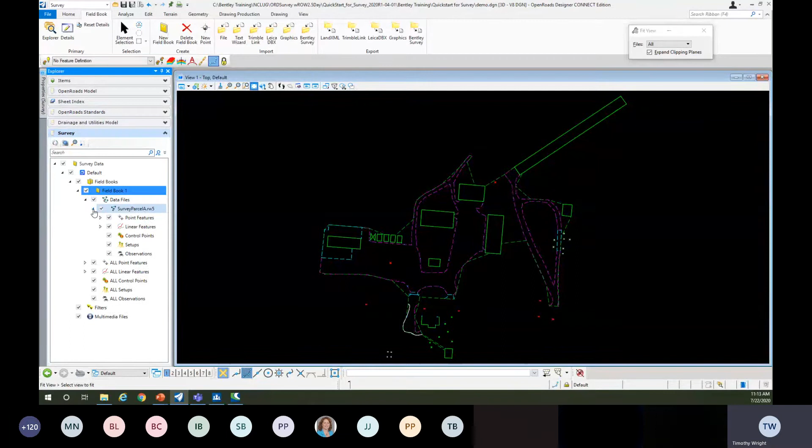One of the first things I want to talk about are these little boxes with check marks, because this can get you into a little bit of trouble. As you're clicking these triangles to expand the different sections, it's easy to drift your mouse over and click on that checkbox, and you'll see what happens then - everything disappears. It's really cool that you can turn things off by point code or point list, like if you want to turn all your chains off or all your linear features off, and just see the pavement points. That's really awesome. But just don't forget that you've got everything turned off. I catch myself a lot of times like, where is my right of way or where's my sidewalks? At some point I've inadvertently turned those off. So that's the first thing I want to make you aware of - these check marks turn things on and off, because that will get you confused.

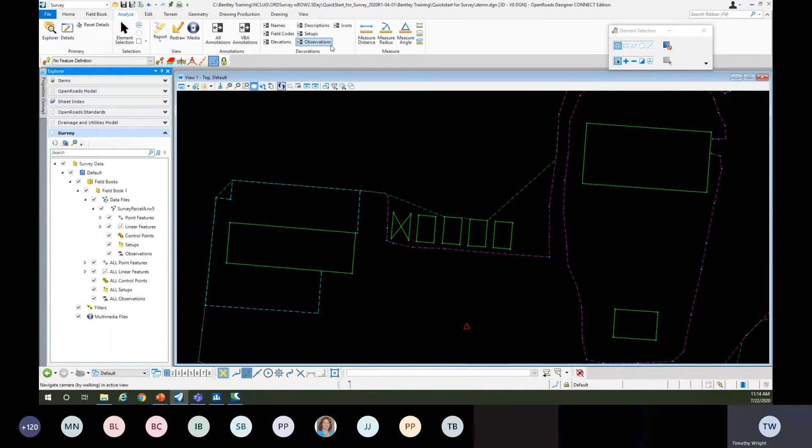The next thing is under this Analyze tab, we have something unique for survey. Design has a bunch of tools that are kind of unique to design, like the cross-section viewer and things like that. Well, survey has some tricks up its sleeve too. After we've processed this data, we can use these decorations.

Now, decorations are a personal type preference here. So now that I zoom in, you can see that I've got my point names, and I can turn on field codes and elevations and descriptions and even icons. Now, what icons do - you'll see we actually have a few data problems with our data here. Let me turn those others off real quick so you can see that. So the software realizes that there are some processing issues with some of these elements. We'll talk about each one of these in turn, but that's a nice one.

So the bad thing about decorations, and the thing that I keep harping on them about, is that there's no toggle - the background doesn't turn blue or orange like some of the icons do. That's kind of obnoxious. It is kind of hard to tell sometimes whether you've got things turned on and off, and you just have to come in here and click on those.

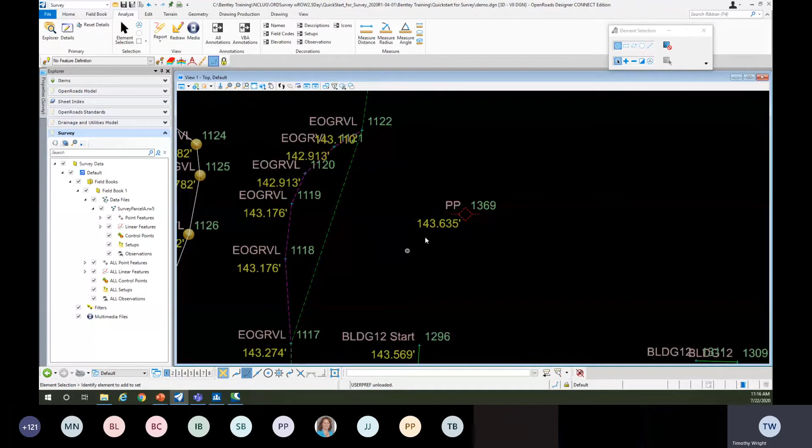If you don't like my colors or the location or the size of that text, that's a simple matter to go back into your user preferences here. I'm just going to show this real quick, not really get into the editing. But under View Options, Civil is Survey Decorators - there's a category. So if you want to get in there and play with those colors or sizes, feel free to do that. It's a user preference, so it's not going to affect anybody else or the drawing. This is a user preference. So again, this is just a tool, it's not labeling - these are not static text elements. I do believe they'll plot though, I do think they'll print because it's usually WYSIWYG - what you see is what you get. All right, just for sake of clarity, I'm going to turn all those off. I will leave the icons on.

So that's the interface in a nutshell. Again, go ahead and open up the Explorer, get it docked off to the side wherever you want, but you need to leave it open because this is our playground, this is our environment. And don't forget about decorations - you can come out here and toggle point names on and off.

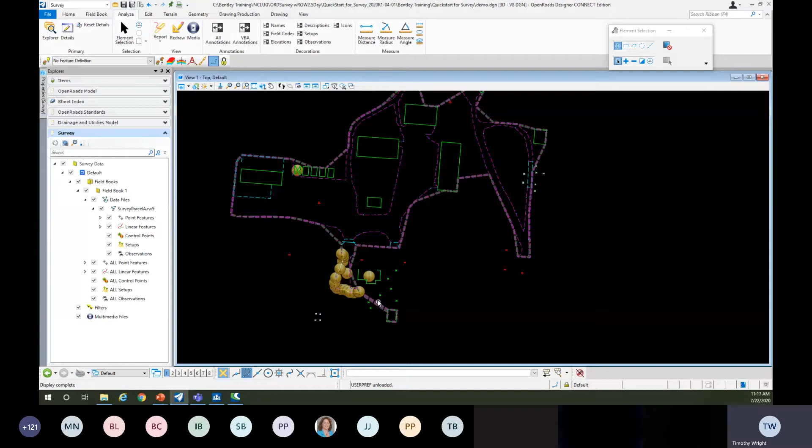So let's talk about what we got here. We've got a file that processed in. Like I said, this was all done by standards, so the software knew how to handle this data. In the next set, we're not going to be so lucky, so we'll have to jump through another hoop or two to get that to work. But let's talk about editing here.

The first thing we'll see is this green dashed outline, and that's our terrain model, and that's the star of the show today. If you're not familiar with the way terrain models work in Open Roads technology, it is an element that's going to contain all the information that we know about that existing ground. Now that could come from LiDAR data, it could come from hard survey shots like we see here. There are a lot of different sources where you can build this terrain model element. And it can take on different facades or different displays based on a feature definition.

Now, I always tell people when you're in the survey file or when you're in the terrain model file, ignore these two categories. These are the elements - I forget the exact term, but basically break lines, points, voids, things like that. These are elements inside the actual terrain model element, so actual physical things. Then things like contours, triangles, and flow arrows are all built on the fly. These are calculated features, or component features, I think - I don't remember. But I always tell people to really just ignore this, okay?

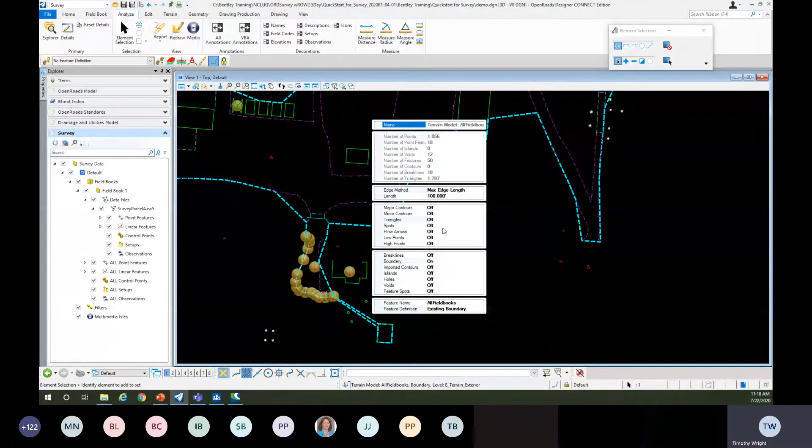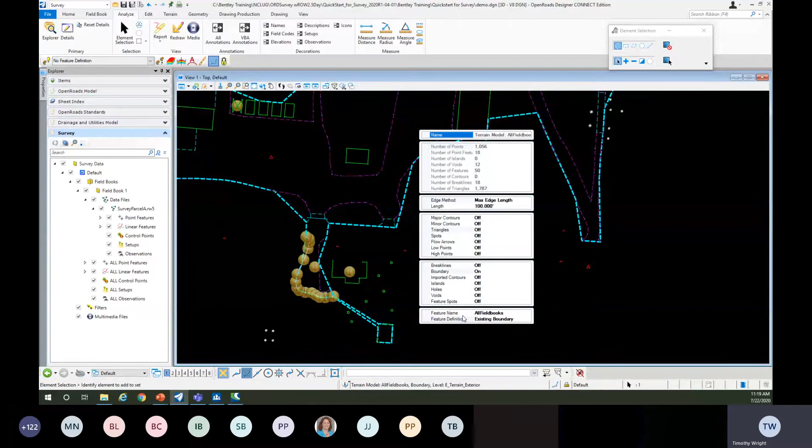This is more for when we reference that terrain model in - you can turn things on and off here. If I turn things on and off and something changes with that terrain model, as soon as I do that, it's going to go back to the feature definition, okay? So to clear up that headache, I always tell people, come down here to the feature definition. Right now you'll see we're set to existing boundary. I'm just going to click the down arrow and say, show me triangles instead. After a second, that file processes, and you can see the triangles there, okay?

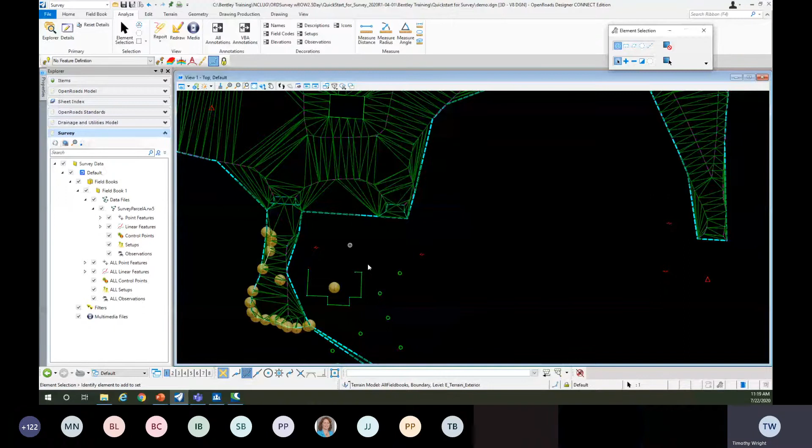Now, when I say processes, it's not like we recreated this element, right? The terrain element is what it is. It's just changing what features are displayed. Again, it's much better to do this via the feature definition when you're in the file than to toggle these on and off. I know it's right there, it's like why can't I click on it? But trust me, as soon as you make an edit, it will go back to the feature definition, and you'll just find yourself turning those on and off constantly.

So it's an option when you're surveying, or it's one of our configuration setups that we import, or we create the terrain model from the survey data as it's being processed, okay? You don't have to do that - this could simply be all the survey elements without the terrain model. But let me show you why I like to see the terrain model as I'm editing the data, because you can find a lot of errors just by looking at contours or triangles.

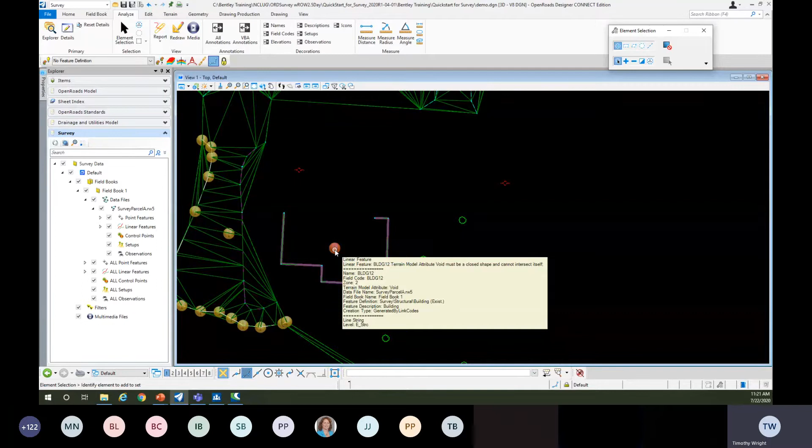It also, up there at the top, says the linear feature is a terrain model attribute void, but it must be a closed shape and cannot intersect itself. So we've got a problem, and the software says, hey, you told me buildings were voids, but I can't make a void out of an open element. So how do we fix that? There's a couple ways - let me show you the graphical way.

All I'm going to do, I've got my element selection tool selected here, I'm just going to left click on that chain. When I do that, you'll see these little bits of text pop up - these are handles. Elements now, there's no GPK - I don't know if you're InRoads or the other Geopak state, but we had a GPK file that ruled everything, right? That's where all the data lived, and that's no longer the case. Now all the data, the engineering data or the survey data, is on these elements themselves, or stored within them. You can tell that just by hovering over it - this thing knows a lot about itself.

These are the linking codes for the points. If you're not familiar with linking codes, they're a code added to a shot out in the field that says, hey, I'm going to start a line here, and then I'm not going to change that line till I get to the end. Well, that's the problem, because we went off and started picking up another house, right? And we never did close this house. So what I need to do is go to that last point that we picked and change its linking code.

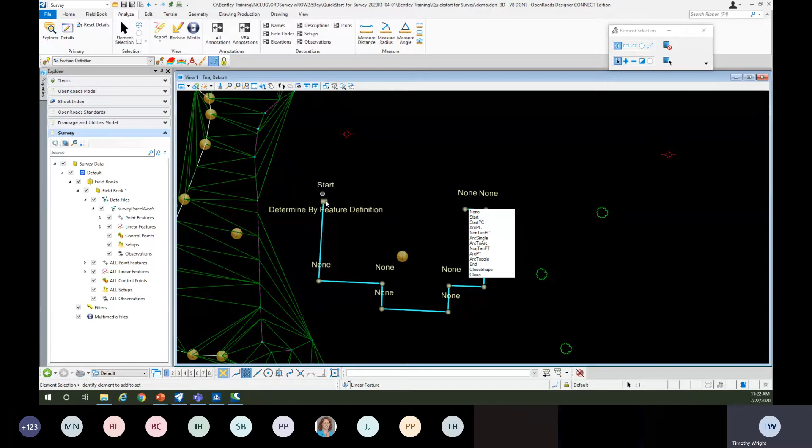The nice thing about these handles is I can left click on it and a little dialog pops up, and I can say, you know, you were really supposed to be a close. We'll talk about close shape in the next data set, but I'm going to say close. What that's going to do is take that final point right back to the start. But notice what happens to the terrain model - you can see our terrain model out here. So I'm just going to change that linking code, and instantly that terrain model updated.

If you haven't seen this before, your mind's blown, right? Because no longer do you have to say, well, is my DTM up to date, or my triangle file, however you handle that. Because as I edit this data, it's rebuilding that terrain model. So things have changed in those elements that go together to create that terrain model, and the terrain model automatically updates the triangle.

The other handle we have available on linear features is this determined by feature definition. If I hover over that, you can see that's actually the terrain model attribute. So right now, whether or not this house is part of my terrain model is determined by its feature definition. If you're not familiar with feature definitions, they're really the wave of the future and how OpenRoads Designer works.

Under our standards here, I can show you that real quick. We've got tons of feature definitions, and under survey, this goes pretty deep. I'll just pick one - how about landscaping? Well, there's only one under landscaping, tree, right? So for our trees here, there is a feature definition. There's a one-to-one relationship between the code out in the field and our feature definitions.

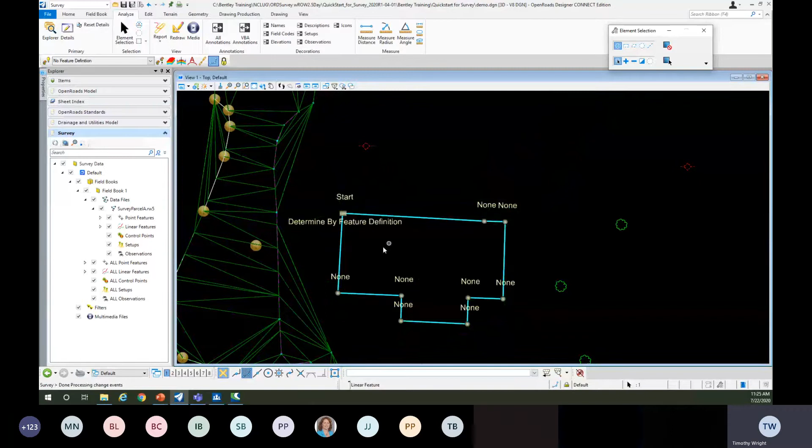But I can always come in here and say, you know what, even though you're supposed to be a void, nah, don't include. And you'll see it automatically drops it right out of there. That handle just needed to update. If I wanted to change that back, it's an easy matter to do. And again, the terrain model updates almost instantaneously. So that's a quick edit, right?

There's other ways to edit too. So as I come in here, I've got a culvert right here, and I happen to know that this point here, you'll look at its elevation at 142.71. If I look at the other point over here, it's also at 142.71. Now that might cause a problem.

So what I'm going to do is select it, and then go over here to my properties tab. You'll see why I kind of like that as a tab, because now when I hover over it, it pops up and there's my points. Now, anything in these fields that's black or dark, you can edit. You'll notice there's my elevation field right there.

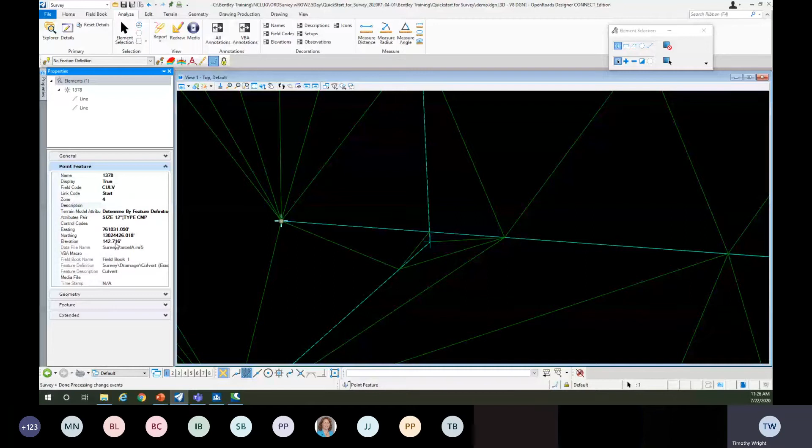So all I need to do then is come in if I want to make a change to that elevation, and I don't have to make a big change here. I'm just going to give it something so both of these slopes aren't the same, right? So we actually have a little bit of slope to our culvert. That was just an error in our processing.

Another thing we can see here is we've got a linear feature that's white. Let me do this real quick - I'm just going to turn off my triangles. Again, the way I'm doing that is just selecting it, going to the properties, and changing the feature definition. It really takes seconds to do that. So now we're back to just seeing that perimeter or boundary element.

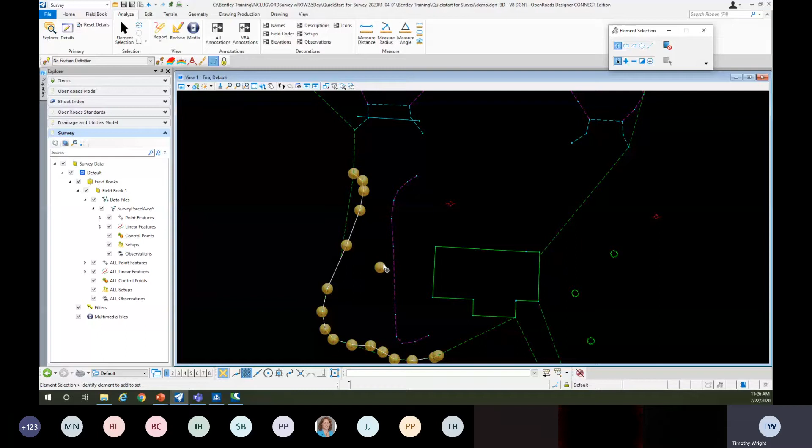So you'll see that there's a bunch of those icons all over there. And if I hover over it, it says EOGVL is not found in feature definitions. So what does that mean? Well, that means that we processed those elements and we couldn't find that feature code. And so we just gave it a default.

Now, if we hover over to the next one, you see we just fat fingered it out in the field, right? It's EOGRVL.

Okay, whereas this one is just EOGVL. So you might be tempted to just go ahead and grab that chain and change its properties, because you can look at that and you can change its field code. But I caution you against that.

I always tell my people, or the people that have taken my training, be a good physician. Because if you think about it, this linear feature has been created by those points. It's not like a separate entity. There's actually a relationship between these points and that linear feature. Let me show you that.

If I open up the points feature now, the category, you can see the different point codes or feature codes that have been entered in the field. So this is our list of points. We have some trees, some pavement, here's our EOGVL and our EO gravel. So you see the difference there, and this one's red.

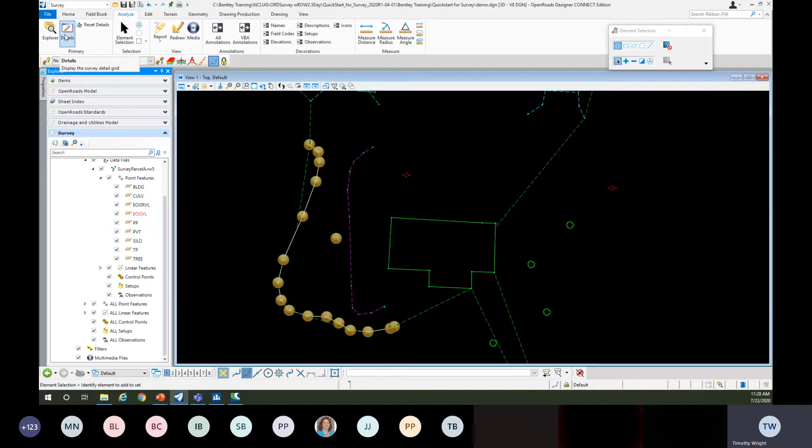I'm going to bring up the next one now. This is the details dialog. And I always like to have this one docked. Now, ironically, a lot of times surveyors are working on a single laptop screen, and we've got the biggest dialogues, it seems. So it's kind of an oxymoron. But it is what it is.

So you have to deal with it. If you do have the benefit of two monitors, by all means, grab this survey details, yank it over to the other side, and expand it maybe half the screen. Because these two work in tandem.

As I come over to the Explorer here, you'll see it's kind of shrunken up a little bit, but I can still scroll up and down through my list. As I select a category of points, like my EO gravel here, it populates down in the survey details.

And if you'll remember, I said, if a field is dark or black, you can edit it. And that's true here. So I could come in here and I could edit every single one of these attributes that's dark and make those changes. But you're probably thinking to yourself, well, I don't want to click through like 30,000 points to make that same change. Well, you don't have to.

You'll see we've got columns or rows over here where I can select those points, and it will highlight that point. It gives me a little identifier there, a little purple halo, and you can identify those points. So I can select each point in turn by clicking on its row here.

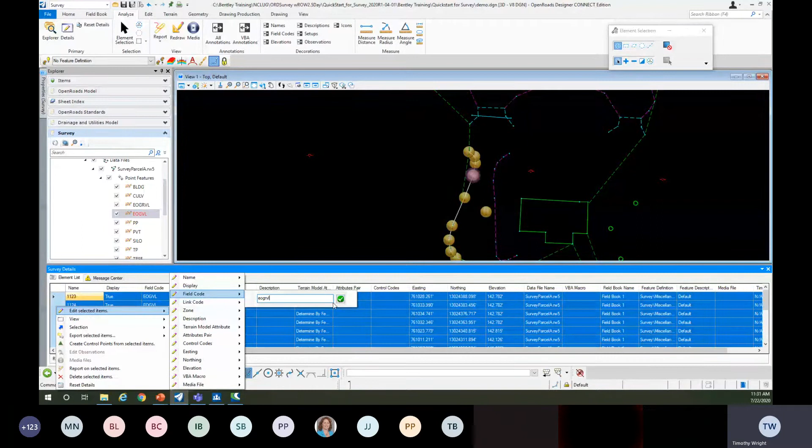So now it's going to be EOGRVL. Now, unfortunately, this is another thing that kind of drives me a little crazy. You have to click the little green arrow. Just hitting enter doesn't do you any good. So you got to hit the little green arrow.

You'll see that a lot in survey. As soon as I clicked that green arrow, look what happened to that line, because I changed the points, the underlying problem, and it fixed the line as well. So again, be a good physician. Don't treat the symptom, treat the disease, and the symptom will go away.

Okay, that works for triangles too. We had troubles with our triangles with this house. We didn't touch triangles. We changed the house and that fixed everything.

We've got one other edit that I want to talk about real quick. So this is leaving everything as what we call a linear feature.

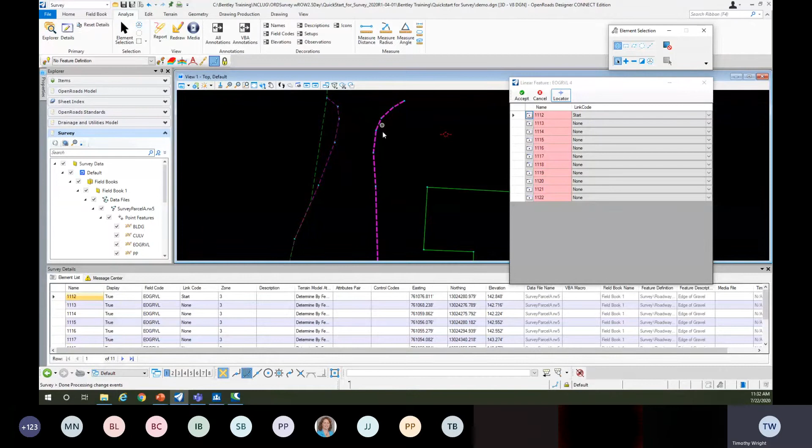Okay, so if I select just a random linear feature here and go to manage a point list - this is how we used to edit survey chains in Geopak. You had a list of points in order and could modify those orders, pull points in and out. But you'll notice I don't have that option now. This is all blank or has a red highlight, and I can't make any changes other than the linking codes. That's because this is a linear feature, and linear features are created by the software by looking at those point attributes and the order they were shot in the field.

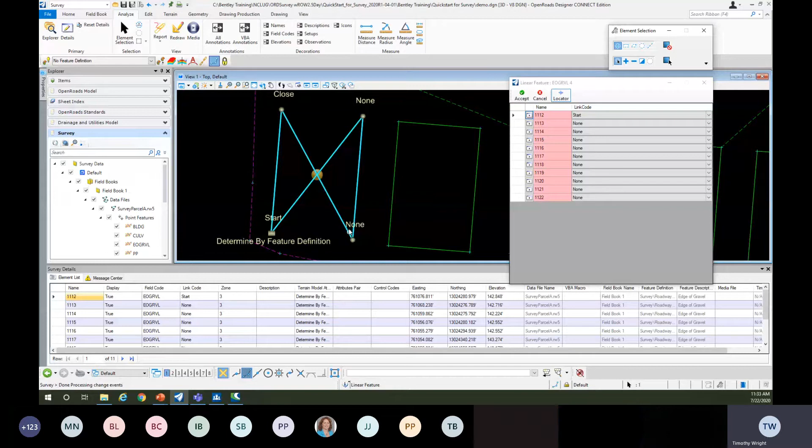And that's what got us into trouble over here. So we come over to this element, and you see they shot this point, then jumped up here, shot that point, then came down, shot it over here, and then closed the shape. So their linking codes are correct, but they shot the order of the points kind of backwards. Now, if I select that element and open up its point list, again you'll see I can't change the order of those points. I can't fix this.

But don't be dismayed, because all we need to do is take this linear feature and drop it down to a point list feature. The way we do that is we select the element, hover over the toolbar, and you'll notice this tool: convert to a point list linear feature.

Now, I caution you a little bit. You'll notice this icon looks like a little squiggly line with three dots on it. I'm going to go ahead and select it now. So no fanfare, no fireworks, no explosions - it just did its thing. It's real easy to think nothing happened, so I'm going to come back and do it again. But now look at this icon - it's just a little squiggly line without any dots.

And this is where you could get yourself into trouble, because if I click that same icon again - the one without the dots now - it turns into a dumb graphic. So it's still pretty smart at this point. Now it's just based on a point list feature. Let me open up its point list and let you see that.

So now you can see that point list opens up. I don't have the red background anymore, and I've got a bunch of new tools up here. You can see I can transpose it if it's shot in the wrong direction. I can insert or replace points. I have all sorts of crazy tools at my disposal.

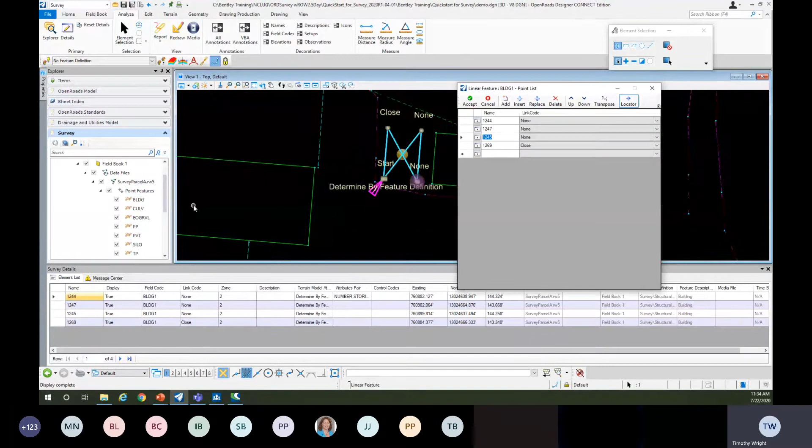One of them is I can select this point here, and you'll see it highlighting, and I say I really need this point to go in front of 1247 - that's 1247 there. So all I'm going to do is use these little up arrows here and bump it up. As soon as I do that, you'll notice the purple lines appear, kind of showing me a preview. So nothing has happened yet - I haven't modified my data until I click the good old accept button. Let me go ahead and accept that, and there you'll see that change is made.

So a couple of different ways to edit your data. Like I said, a lot of times you can do it graphically. You may go over to the properties of the element and change everything there. Or you may have to drop a linear feature down to a point list feature - that's another option.

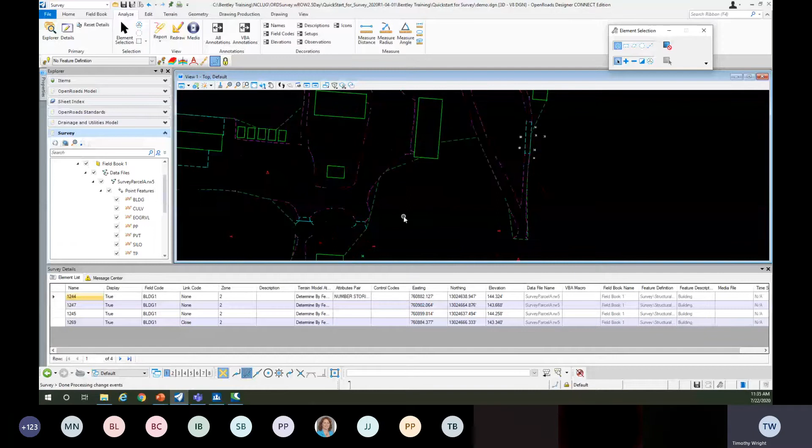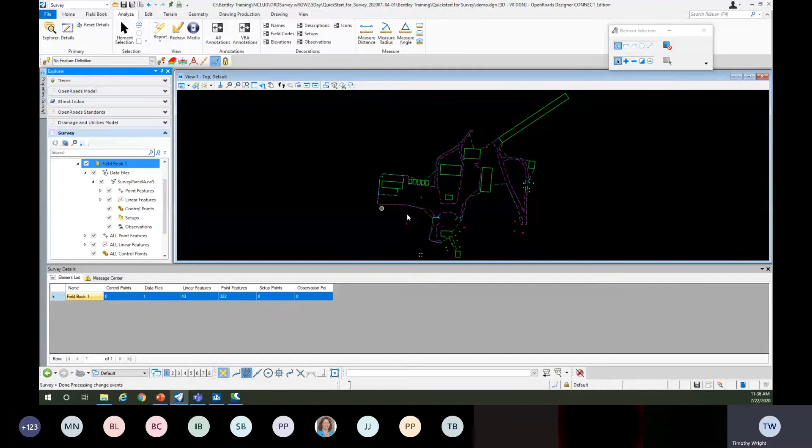Now, you'll remember that I said we can create the terrain model as we go, and I like that because you can see the effects of your edit immediately. But you don't have to. So let me go ahead and delete this terrain model - it's just an element - and show you how you can recreate that. As I come in here, I'm going to go to that field book 1 and right click and say create my terrain model. It's literally that simple, and there you can see that terrain model pop up.

Now, there's a couple more things I might want to do to this terrain model. We're not critical on time yet, but I do want to show you a couple of things, so we'll talk about edge triangles. Let me bring this back to triangles real quick so we can see that. Not the best terrain model, but there's a really good chapter on creating and editing terrain models, so I suggest you explore that further. Let me show you this real quick.

So we run into a little problem with this dynamic terrain model. That's when we come to these edge triangles, because you can see here we don't have any real points out in this area. Our last real point is this driveway chain, right? So typically that should be the edge of our terrain model. These extra triangles here really don't belong here.

So there's a few steps we have to take to do this. Now, I highly suggest you wait till you're done collecting all your data. You're getting ready to pass this off, then you correct these edge triangles. Until then, just ignore them, just live with them, okay?

So I'm going to select that terrain model. I'm going to bump my mouse to get the options here, and what I'm going to do is come out to my terrain tools here. And I am going to edit the model here. Now, before I do that, I have to turn off the dynamics of it. And now that I think about it, I wonder if I change that process.

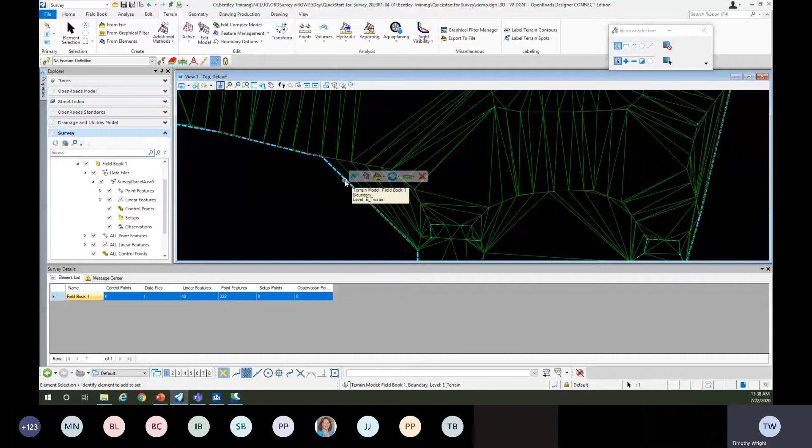I think I might have confused it there when I deleted that terrain model. Let me select that guy again and see if I can bring him back. Let's go to properties. All right, so that's from my existing. That all looks good, match edge length, major contours. All right, so I think we should be good here.

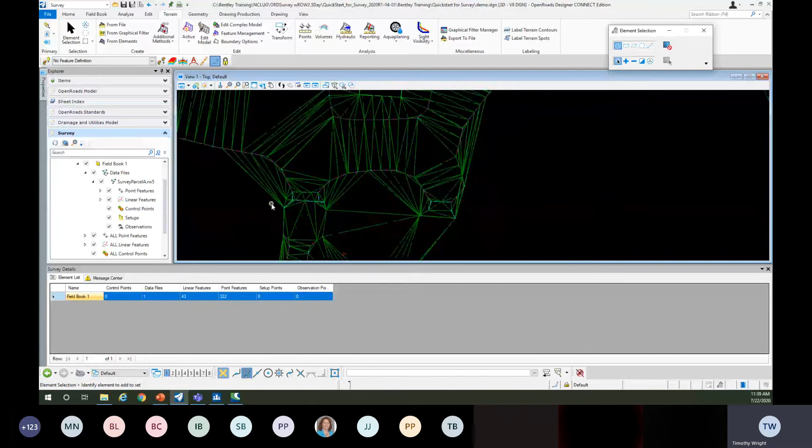All right, so let's go to our real data set. Oh, one more thing before we go into this, we'll do triangles in the other one. One more thing before we leave, I'm just going to bring this back to our boundary.

One thing I do want to show you real quick is annotation. So annotation now is driven by the feature definitions. Under our drawing production tab, I'm going to come in here and say annotate the entire model. I'm going to do all the drawing models—no, because I have just this one here. So let me left click it. After a second, it's going to process, and you'll see just how powerful this is.

So here we've got a building, you can see our trees are labeled, even this culvert here. So it figured out this was a field note, right? When we look at that, we can see we have a field book—oh, no, attribute pair. There's our attribute pair, about the 4th or 5th line down. You can see size, 12-inch type CMP. All right, so it captured that right there.

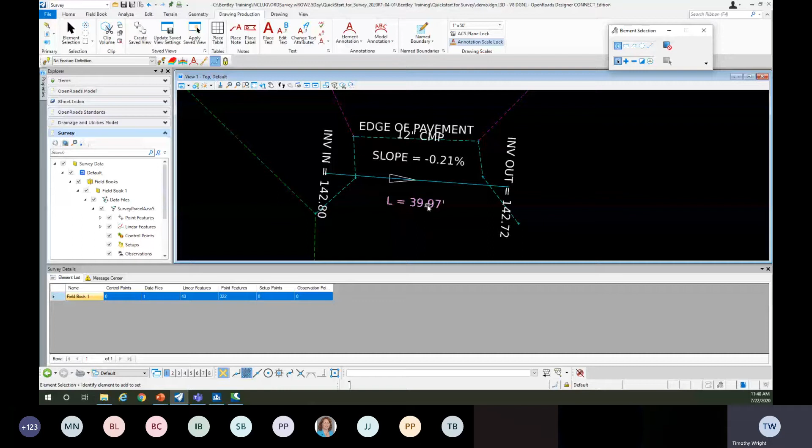The software actually figured out what that slope is based on those points. That's why I had to come back and fix this elevation, because in our data set these two points have the same elevation, and it kind of confuses the software a little bit. But you can see that it grabbed the length—so the length is actually the length from those two points. Again, the software is pretty intelligent as far as labeling goes.

So things like your control points can be nicely labeled, and of course this is all user defined, or by your environment. So you can decide what gets displayed here, how it gets displayed, and all that good stuff. So I wanted to show you that.

But before we run out of time, I want to get to the other data set. To do that, I'm just going to go ahead and make a brand new file here, and scooch out of this data set, and go for the importing and reviewing survey data. So I'm just going to come in here and say, create a new file here.

And again, just a blank file. So now what we're going to talk about is the geographical coordinate system.

That last data set was kind of made up, so it didn't have a real geographic coordinate system. Another annoying thing is that there's no geographic coordinate system on the survey toolbar. I've put in a ticket on that, I've kind of yelled at people, nobody has fixed it yet. Hopefully in later releases we'll see this dialog move over to the survey workflow.

If you're a surveyor, I don't have to preach to you about geographic coordinate systems and how important they are. For laymen, this is basically the coordinate value we give that little brass pin put in concrete, our benchmarks. The Earth moves, right? Plate tectonics, we get better graphical models of the Earth's surface, so these points, or the definitions of those points, actually change over time. Each one of those is given a geographic coordinate system. So without a geographic coordinate system, the software has no clue as to where this point is in the world. These are pretty important.

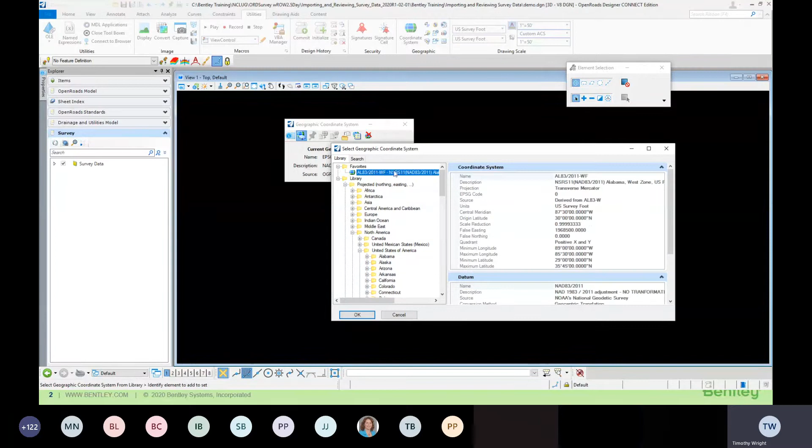So I'm going to go ahead and say okay. Now, if I wanted to, I could add that to my favorites, right? What that does is under your library tab up at the top, you'll see I've already got it listed. In your state, you probably have 6 to 8 at the most that you use, and go ahead and click OK. In Illinois, we had 2 and a couple of different flavors, like NAD 83 or the HARN update, things of that nature. So that's all I've done.

Now, in a blank file, I can change this all day long and it doesn't do anything, right? It's just a placeholder to let the software know what coordinate system this lies in. Now, if we had data in the file and I change this, it's going to ask me a very important question: whether I just want to change that label, or whether I want to reprocess or transform that data. Be very aware of that, and don't just click on that dialog and ignore it, because that's a big deal. Keep that in mind.

All right, so now we're going to do the same process that we did before, where we pulled in that data, but this time we're not so lucky. Maybe we got something from a municipality, or maybe one of our survey chiefs has gone rogue and isn't following the standards. But if I come out here and open up my survey tab again, you can see I've got no field books at this point. And I go ahead and try to drag my ASCII file over and drop it on my field book.

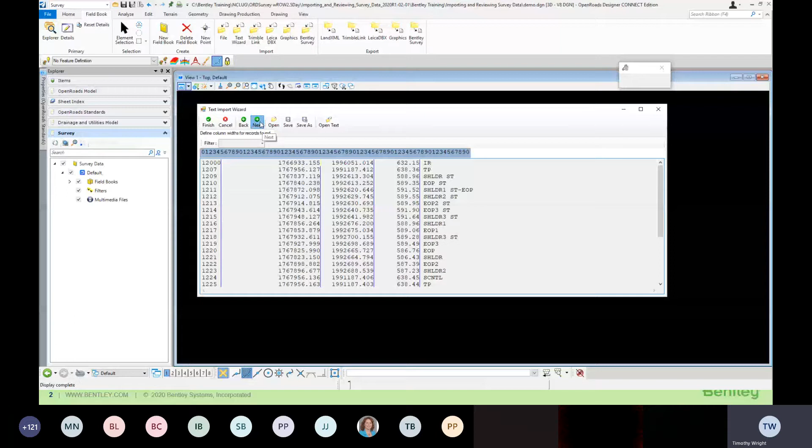Now I just need to click on these headers, and I'll call this the point name, northing, easting, elevation, and finally the codes.

Once I'm done, I can go ahead and finish. It says, do you want to create a TIW file? A TIW file is a text import wizard file.

It's usually a good thing, especially if you're the one in charge of setting up all these standards. It's a quick way to use this tool to create a TIW file, so I'm going to say yes, because that's pretty cool. Now it's going to dump it where all my TIW files are kept, but this may be a problem.

Because if this is off on a server, you may not have rights to that. So let me push this over to our directory here—let's see, try to remember where I put those files. Bentley training, just drill down through that network real quick, and I'm going to dump it here. You'll see I already have one called Tim, so I'm just going to overwrite that one real quick.

Another important step: save the TIW format in the import settings. That's pretty cool, go ahead and do that for me. I'm going to click yes here. You'll see it's going to process in the bottom right-hand corner. I'll do a fit view, and now that pulls in.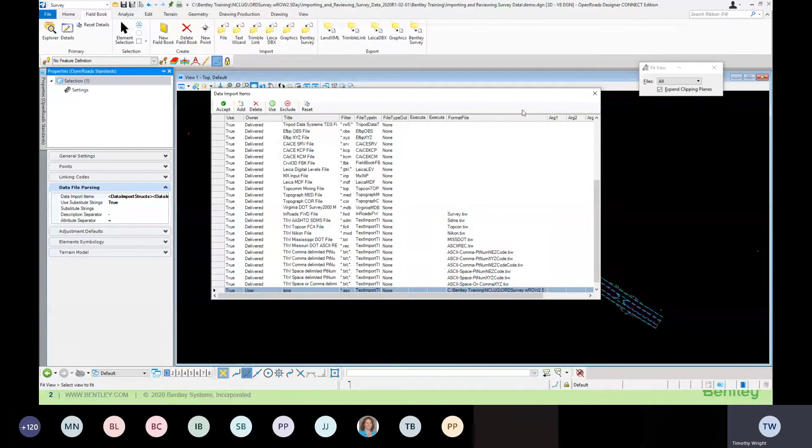What's awesome about that is I can go back down to my survey tab now, come down to my field book. There you can see I have one data file so far, but I can go back to my Windows Explorer. I can grab the rest of those 3 through 18 here, and drag and drop them now. I'm going to put them in the same field book, under field book 1, left click, and it's going to process that survey data. You'll see it's going through the different files there.

Remember if we had duplicate names on this or not, we may run into that. It may be what it's waiting for. Let me see here - nope, okay, that's the other data set. And there you go, so it processed.

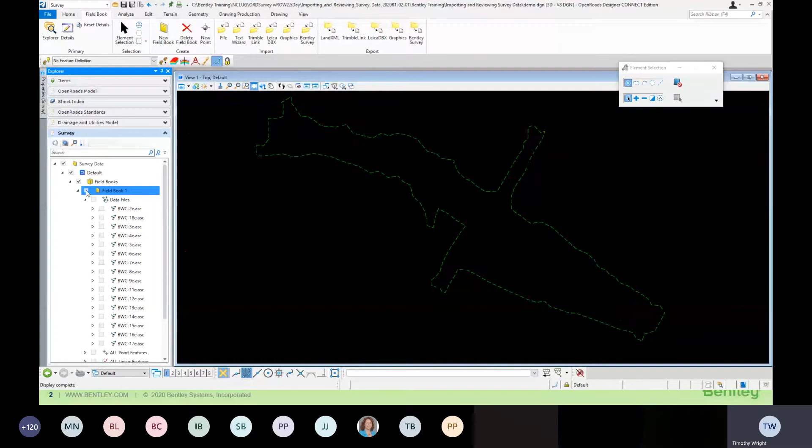Now, if you remember at the beginning, we talked about how you have your field book here. You can see that even though I have a single field book, the software keeps track of all the different field book files that I brought in - all the different collection sets. So if you have a rod height bust on something, I can turn off my field book here, and come down and say this was the data collection that's our problem, so I'm just going to deal with these points here. You can do that. Turn those back on - like I said, these little check marks are a blessing and a curse. They can get you confused.

All right, so now let's talk more about getting that final terrain model pushed out. We saw some ways to edit terrain models. I'm going to show you another way, or a process that I kind of like.

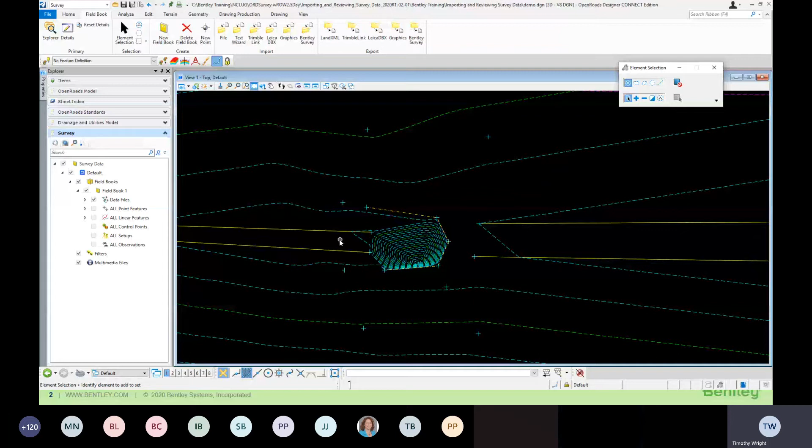I'm going to go over here and set my terrain model to triangles - I kind of like triangles. You can do contours too, and I think in this data set, yes, okay. If you know anything about contours, that's a problem - you can see that point there has issues. We've got some others, but I want to go back to triangles real quick because I just want to show you something.

Hopefully we'll have a little bit of time for questions.

So now let's talk about rotating your view. Again, we're in a 3D file, and this confuses a lot of people. If I come up here to the rotate view icon, click and hold for a second, the drop-down list appears. I can pick a couple of presets like an isometric - that's pretty nice, right? Or I can pick the top view. A lot of people like to work off of that.

But we also have rotate view, and this is what gets people in trouble. If I just pick this and rotate it - this is pretty good actually, I got lucky. But if you think about holding an apple right in front of your face and just rotating your wrist, you can rotate your wrist all day long and it won't get out of your field of view. But if you hold it at arm's length and rotate from your shoulder, pretty soon you're not going to see that apple anymore. That's what this little cross is - your rotation point.

So I like to pick that up and just let AccuSnap find a point on your model or your terrain model there. And then that 4-pointed compass, I can pick that view up and rotate it around that point. What's nice about this is I can come in here and already I can see there's my little point that we saw with contours - you can see that little sinkhole. So that's a problem.

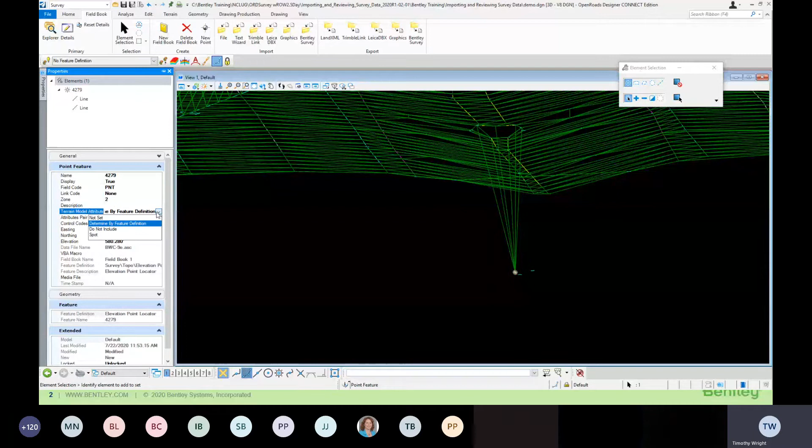So if I select that point there, for whatever reason, that guy should probably not be in my terrain model. I'm going to select him, go over here to properties, and there's my terrain model attribute. I can just pick the properties and say, you know what, don't be in the terrain model anymore. There, it's fixed. I'm going to go ahead and rotate this again, and you can see another problem - now we've got a break line here. It looks like a culvert or something, creating a weird little crevice here in our terrain model.

Now, to see this a little better, something that I like to do is go from wireframe here to one of the other methods.

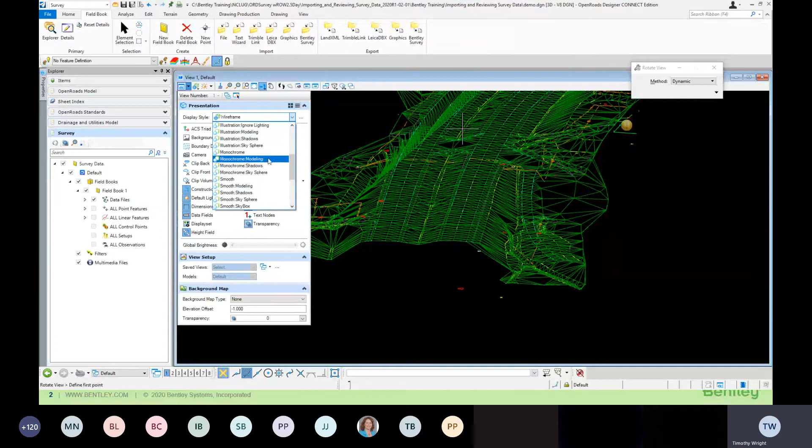Illustration, ignore lighting, that's a pretty good one. Now you have more of a solid surface that you can look at, and you can see where the problem is. Basically, that culvert has cut a swath through our terrain model.

Okay, so again, an easy fix, right? I select my linear feature there and go to its properties, either directly or from the pop-up menu. I go to properties, and again, the terrain model attribute is wrong. I just say, don't include that. And my terrain model is fixed.

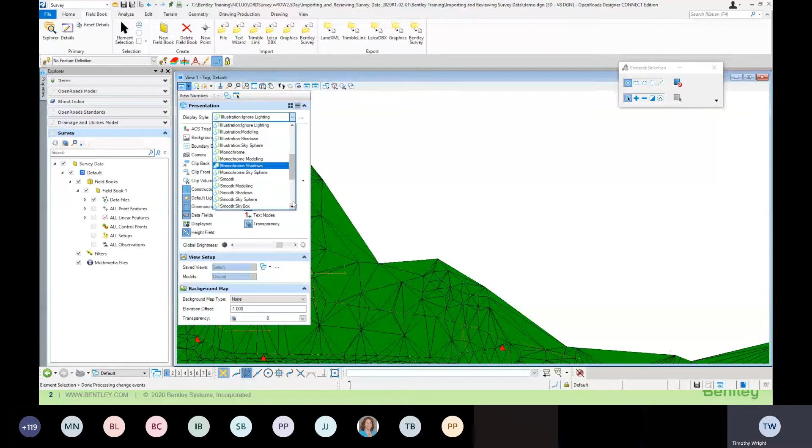Okay, now let's pretend we've got our terrain model all cleaned up and ready to go. We talked about those edge triangles a little bit. Let me find a good place to show that. Let's edit - let me get back to a wireframe mode, it's easier to see what I'm doing. So like these triangles right here, probably not good triangles, right?

So real quick, before we run out of time, I'm going to select that terrain model. Why aren't I getting that handle? Let me think here - I'm going to edit my terrain model, use command. All right, something's broken here. I don't know if it's my software or what, but I should be able to come up here and edit that terrain model. I don't know why it's not letting me do that.

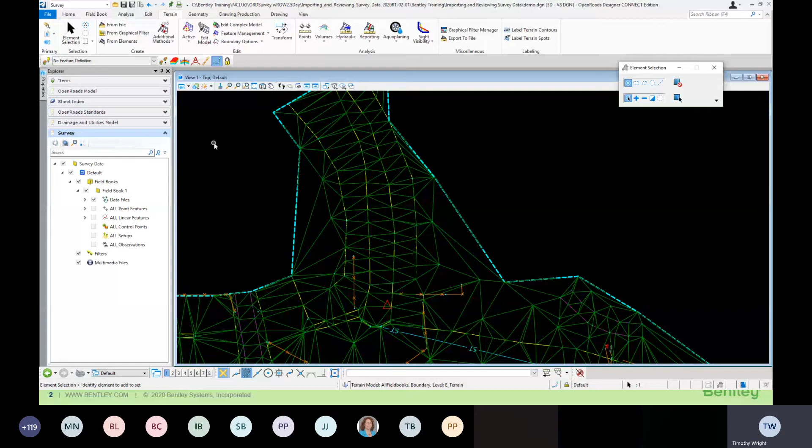All right, well let's try one more thing because I need to show you this anyway. So a lot of times, like I said, I like to have the terrain model in the survey file as we're editing it. But sometimes that's not ideal - sometimes you don't want this terrain model to be part of your display or whatever you pass on to the designers. So there's a couple of ways you can do that.

One of the ways is, real quick, we can create a new file. Before we do that though, let me select my terrain model, and you can see we've got export options here. So I'm just going to drop this out to a TIN or a DTM - it doesn't really matter which, because they're all going to be pretty much the same here. You'll see I've already got a file called that because I was playing around this morning. I'm just going to drop it out to that.

I'm going to come up here and create a new file. Again, it has a terrain model, so it's got to be a 3D file. I'm just going to call that terrain. And just for fun, I can show you that geographic coordinate system. So as we go into our drawing here, look at our geographic coordinate system - it is the Georgia one, or North Carolina, excuse me.

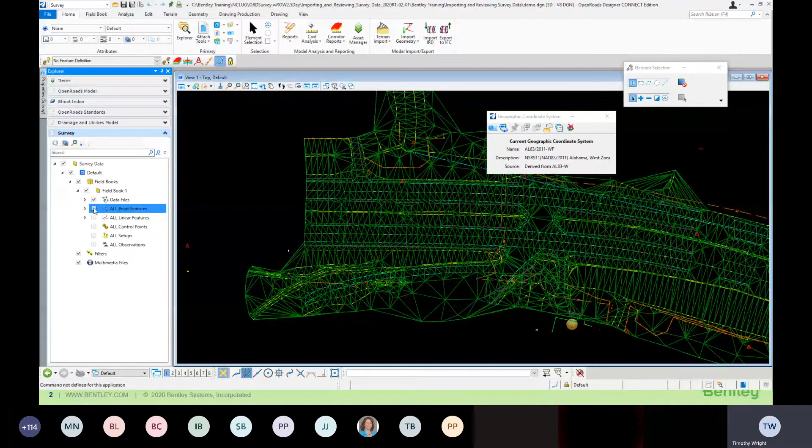What I'm going to do is pick my edge of pavement here. I'm going to open up my details, select all those points, all my edge of pavement points, right click, and edit their elevation, and do some math.

So this is pretty awesome. I'm going to say minus 10 foot, just to give us a really drastic change here. I'll go ahead and click that, and it's going to process that model. Now, I still need to update that DTM file, right?

So I'm going to select that and say export it again. I'm going to update my DTM model and save it.

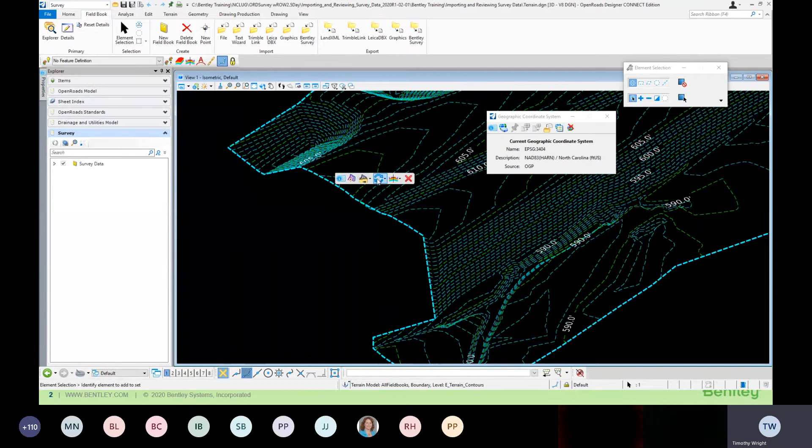Now, when I go back out to my terrain model, my DGN that has just the terrain model in it, you'll see nothing's changed, right? Well, the terrain model hasn't known that anything's changed, so we just go up here and say update from source, select the file. You'll see it kept that entire path, and there's my changes. You'll see that terrain model update.

So again, this is only if you want to separate that terrain model from the rest of the survey data. If you're okay with both of those living in the same file, that's probably the best option, but it's certainly another course of action.

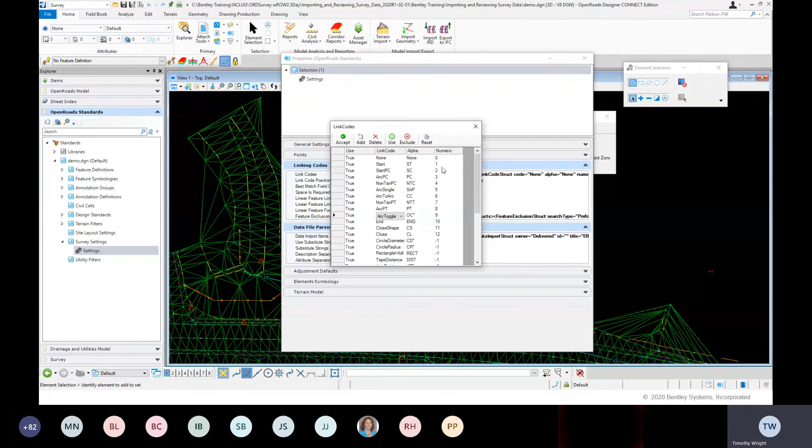Another good one is the arc toggle, which replaces your arc PC and PT with a single code. Get with your survey crews, they'll come up with what's easy to enter out in the field, and maybe they already have some kind of codes or standards, but then you can simply define those here in this list.

Now, a lot of these survey settings, you'll want to go ahead and build a standard setting, and then copy that into a DGNlib, or rename that to a DGNlib. So like I said, when that field book is created, everybody gets a copy of that entire settings.

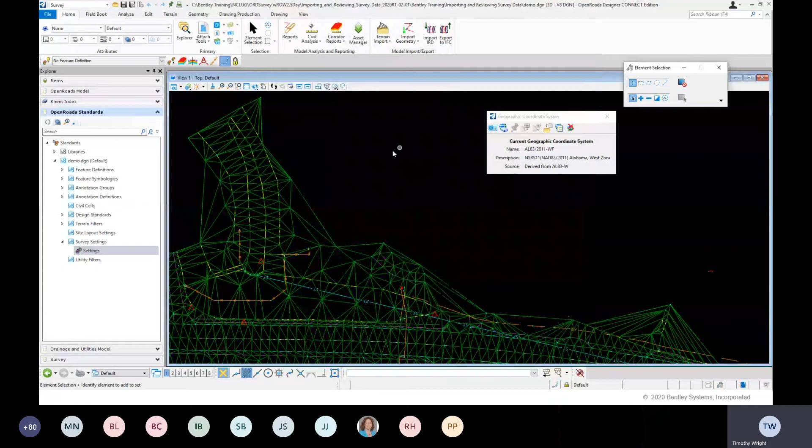Now we have another example over here of close. This building over here has an issue. If I select it here... okay, so you can see they started shooting the building here and they wrapped it around. Now they come back to none, so that's the end. Now, I alluded to this earlier.

There's actually two closes and they are quite different. If I just do close, you'll see it's just going to do a diagonal line, and that's not really what we want. We have another option and it's called close shape. What close shape is going to do, it's going to take the start point and the next point and find that...

That's what happens when you talk solid for an hour. It takes the start point and the second point and finds that angle or that ray, and then is going to project a perpendicular. Let me show you that here and you'll see what I mean. So when I close shape, it says, where is a perpendicular line to this first one? And then I'm just going to intersect those two. So that's kind of cool.

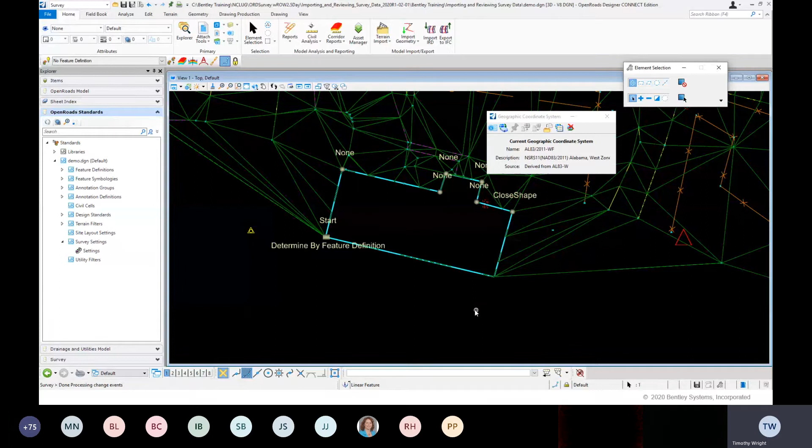Out in the field, if you're a surveyor, you can shoot three points and just say close shape. Let me highlight that again so that updates. Close shape, and it will automatically figure where the corner of that building is. Okay, good question, I hope that answered that.

A lot of times, working with the survey crew or with your client or whoever, they should have a lot of these set up and running. I'm working with Texas right now, and I always joke when I was with Illinois, we had 9 districts in the state and 13 different ways to survey. So sometimes surveyors are a little independent and you got to kind of work with them to get everybody on the same page. But you can see the benefits of this, right?

For the end user, when you have everything set up, it's literally a drag and drop operation, and boom, you're off and running. Make your changes and you're done. Good question, any others?

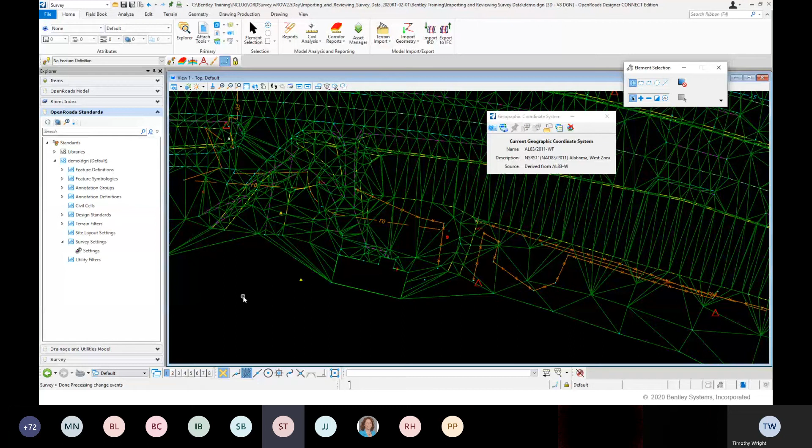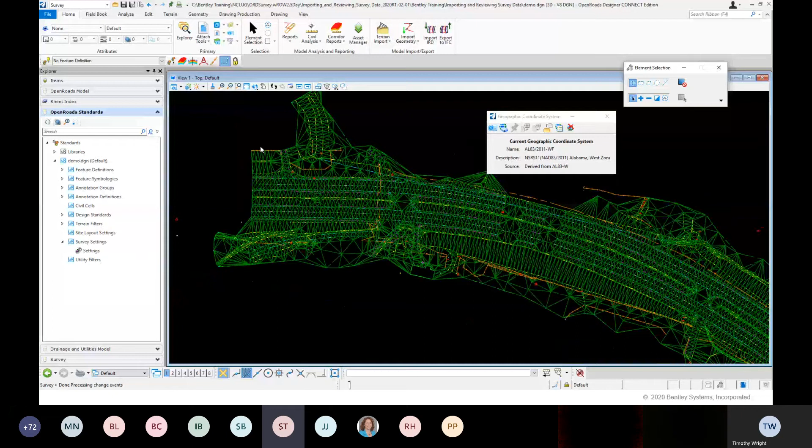You mentioned the terrain files and the survey files must be in 3D. Yes. How do you display like 2D features like wood lines and property ties? What would you recommend as a workflow for those 2D features that need to be referenced to our plan sheets? How are you collecting those? I guess photogrammetry, it's 3D, it comes in 3D, then they flatten it for us. Okay, in 2D. So what do you want to do with that then? You want to bring it? I want to reference it to a plan sheet, a 2D plan sheet file.

Well, there shouldn't be any problem with that. If it's a 2D element, then you shouldn't have any problem referencing it. If it's a 3D element, you still shouldn't have any problem. So let me show you this, maybe this will answer your question. I'm not sure I'm getting it.

I'm just going to make a new file, but now I'm going to use a 2D seed file, and we'll just call this 2D. This is one of the powers of the software now, and I know you could do this in SS4 as well. I'm just going to attach a file here, so I'm going to bring in my survey. And it always should be coincident world, unless your geographic coordinate systems are different, and then you can do a reproject or transform.

All right, so that's pretty cool. That's another reason why geographic coordinate systems are important here. All right, let me see, maybe why I was having trouble with my terrain model. Looks like something's a little wonky there, that might have been it. So there's that 3D file referenced to a 2D. Okay, the software doesn't care, even if it's a 3D file, you can bring it in as into a 2D file.

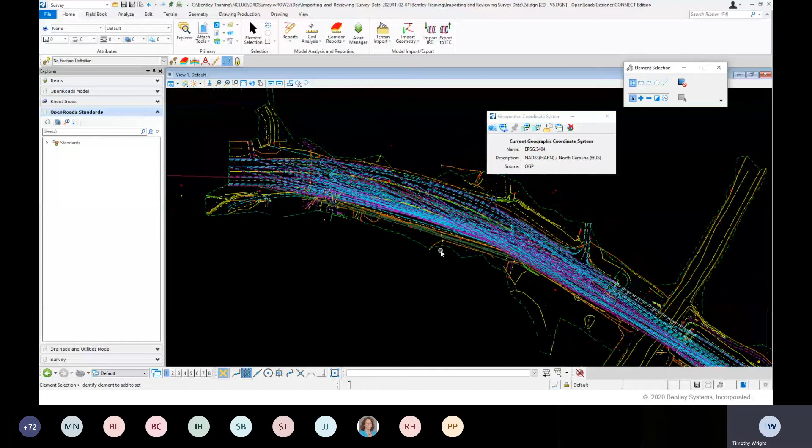Is that the way that feature works, like in OpenRoads modeling, you can have the same feature look three different ways, like a plan view, profile view, and the 3D model? Does this mean that when you survey this data, like the break lines, it has to be on that and only that symbology for plan view, profile view, and 3D model view?

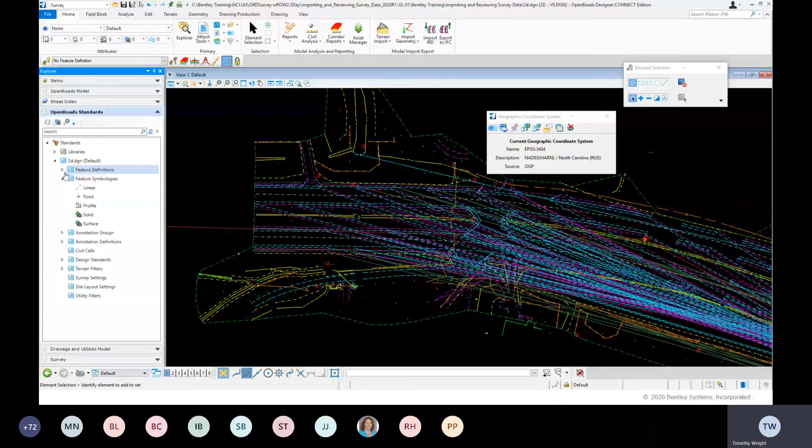Well, okay, so the way that works, we're getting into kind of the configuration side. Well, I'm in my 2D file. Let me go back to my survey file real quick.

So yeah, what you're getting into is more the standard side of things. This shouldn't be something you'd have to do on a daily basis. If you always have, say, a tree line, and that tree line looks one way in the 3D file but different in your cross sections, there's a good way to do that using these standards here.

We'll go open our feature definitions, and you can see this. So survey... not that, feature definitions, survey, there we go. Let's see what we have here. I know we got some bridge stuff, so we'll just open one of those up.

I'm just going to look at the property of that feature definition. Now, feature definitions are kind of a rabbit hole, right? Because it goes pretty deep as far as how things go and how they're set up. But if you look, we've got a feature definition here with item types, survey features, and symbology.

Now I can right click here and show, we've got a new feature definition. We can add these different symbologies. But you can see as a point or as a linear feature, it's going to be this bridge deck, and as a point feature, it's going to be this existing survey point.

So what are those? Those are actually our feature symbologies here. So the feature definition points to a feature symbology, and we can go here and say structures, like our bridge deck. So now we're looking at what actually drives that display, and you can see we have a default.

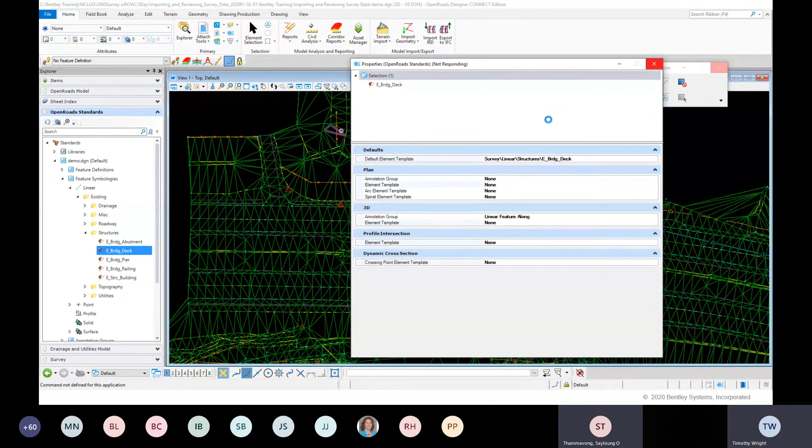Okay, so now we're in the 3D file here. And we're, I guess, top view, looking down. Yeah, but that doesn't matter. Okay, this is a 3D file.

Okay, there's a difference between the quote unquote plan view and a top-down view. They're not the same. Because what I'm getting at is when you create that 3D file there, we kind of want to do the reverse of what we do in OpenRoads modeling. A 2D model is created and referenced on top of the 3D.

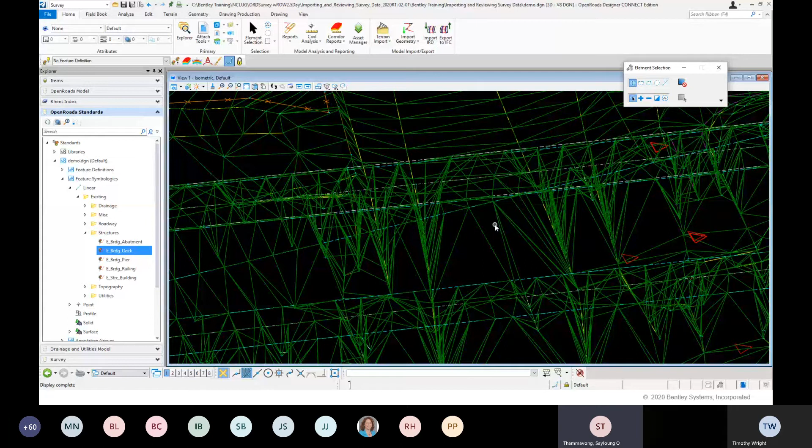So when we reference this 3D model here into a 2D plan sheet, we wanted to see the 2D annotations and symbology, not the 3D top view of it. So you see how you're still looking at the 3D symbology of it, even though you set it to 2D plan.

Right, I guess, well, that's because I'm in the 3D file. Let's go back to the 2D. Right, okay, now I'll have to change it here too, because this file has symbology as well. So if we go out here and look at those, let me try to find one of the bridge decks here. I think that's it, BRDG. So right now it's this kind of green or cyan line here, right?

So again, I've got to change it in my standards. So each file now, as soon as you use a standard, it'll be copied into there. So, not that.

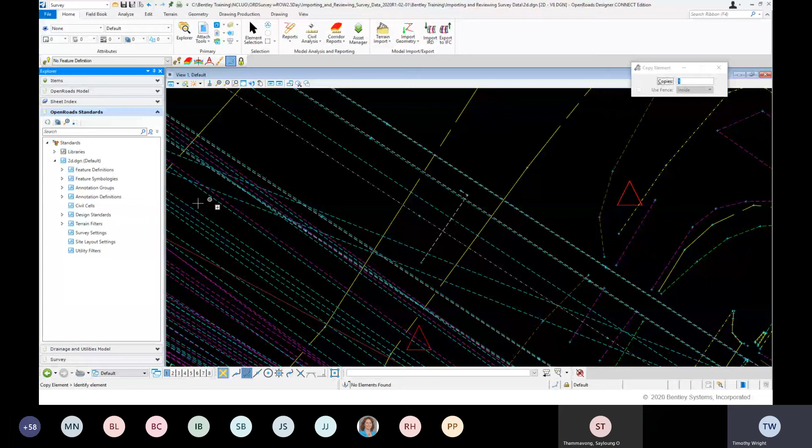How to do this? All right, let's see if I can just copy it. That might be... no, just update from the library. Right click on that. Well, updating from the library will switch it back to the standard, right? I don't want that, I want to get out of the standard. Okay, you want to update this? Yeah, I want to do something different than the standard, because right now it's going to come across as that element. Let me see what I've got here.

I think it just did. Yeah, that's just a line string, you can't really copy elements. Let me see how to do this. This is really a bad data set to show this.

I guess you made the changes in that 3D model, right? And we are referencing that 3D model here in the 2D. Yeah, but each file is going to have its own. Yeah, I guess we could go back and change that. We could do that, let's see if that...

Oh. I think that was in our... Oh, you know what, I think I might have changed demo when we were looking at... Let's see which one we're looking at. We're looking at survey, that's right. That might be the problem. Helps if you change the right file, right? Yep, are we taking a nap? Looks like we're taking a nap. I'll go ahead and start this back up here.

Yeah, I mean, while that's starting, I guess my main question is, you know how in the OpenRoads modeling workflow, we work in 2D and it drives our 3D model, and we can represent and show the symbology of a feature definition in 3 views differently. We could do plan, profile, and the 3D model differently with element templates.

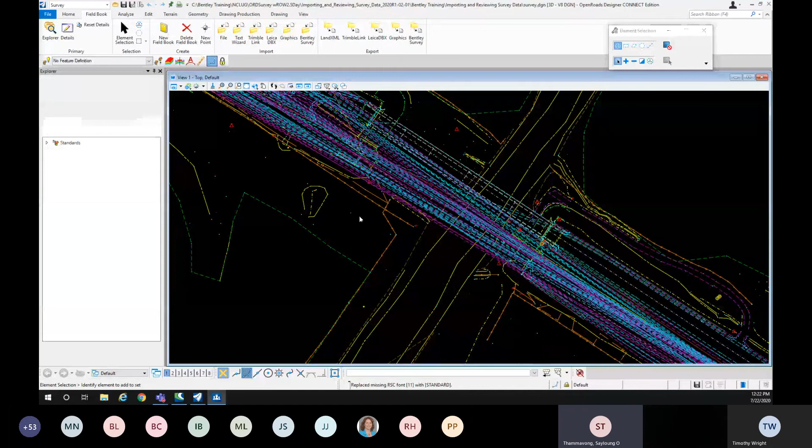And you don't necessarily, like, if you collect the edge of pavement line, the existing edge of pavement line in blue, you want to show it in the 2D plan view as red. Can you do that, I guess? Oh yeah, absolutely. Yeah, that again is under the standards here.

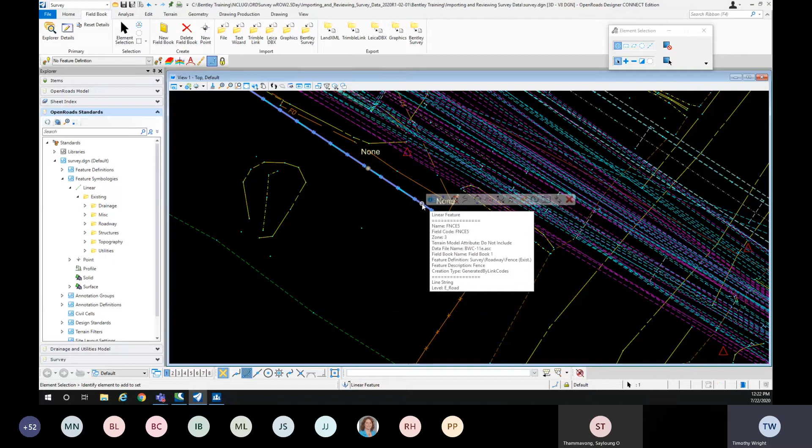So for your feature symbologies, you know, it would be a linear. And again, I'm just going to pick one. Let's do this guy right here, so this is fences, right? And what is its feature definition? Survey roadway fence. Okay, so I'm going to look at its properties.

So what you would do then, for this fence to show up in a different way, let me unpin that. You would just come out here to your plan and say, instead of using that element template, I want to use... well, let's do something fun, like make it a gas line, why not, right? That might be for actual utilities, that might get us into more trouble. Let's just pick a linear. Do we have something fun like guardrail? Or yeah, let's do that, let's make it a guardrail.

Okay, so it's going to take a second to update that feature definition. Now, if we go into the 2D, it should update that. We can try that and see. So let's go back to our 2D now.

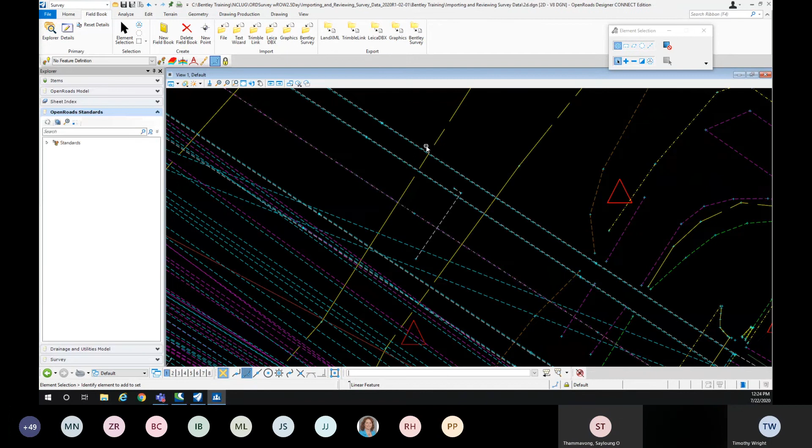Yeah, I would have to change it in this file too. I think so. It would have to be changed in my standards because it's getting this. Let me look at the properties here real quick and just see.

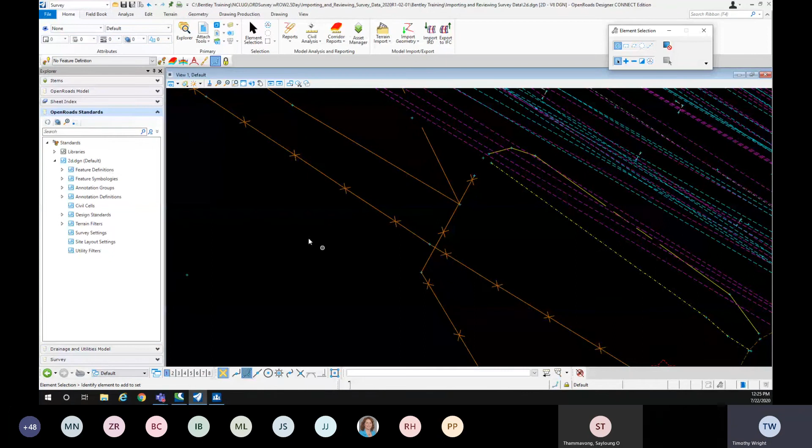There we go. Let's see, yeah, see, it's picking that from the feature definition. In this file, it would have to match what we changed, so we'd have to change our DGNlib for that to work. It's pulling that across, but yeah, it could be different, I guess. Yeah, I guess absolutely. Yep, it just takes a little more work than I can do off the cuff here like that.

Right, but certainly can be accomplished. Yeah, I mean I misunderstood something that was earlier. It says the 3D feature is always going to be a 3D feature, you can't change to the element template. And I was saying, well, we do that all the time with OpenRoads modeling. We can change the way something looks in plan view, profile view, and 3D model view, have different element templates for them.

Right, and again, that's all organized by the feature definition and the feature symbology. That's what drives those, so that's where our changes would have to be made. You can see I don't have any in this file, this active file right now, so it's all pulling from the library. So that's the problem. Now there's no 2D model at all with survey.

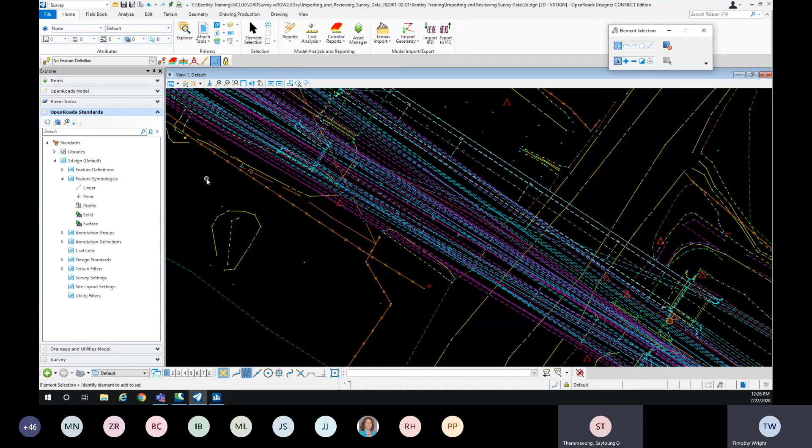No, everything's going to be 3D. Okay, yeah, and honestly, if we're in a 2D file now, if I tried to process, I can go ahead and do this, I guess, just for fun, right? I'm not keeping this. We've got survey. If I go out and just grab one of those files, show you what it's going to do here.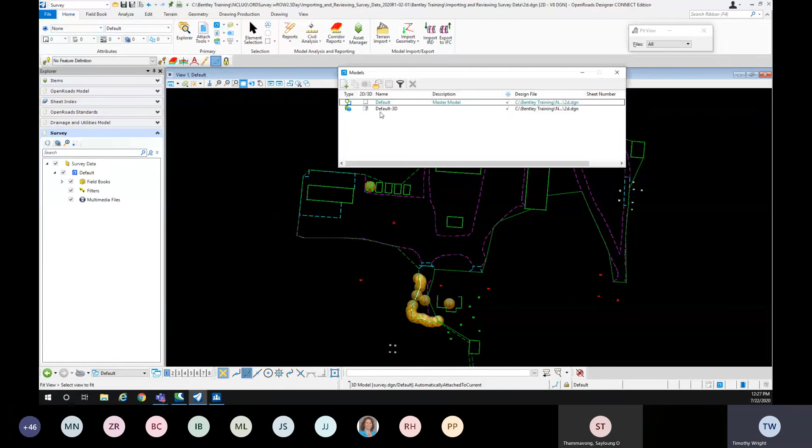That's our file from before, so it processed it, right? We're here in our 2D file, and you can see it pulled it in. But what it's done, because it's 3D data in a 2D file, it actually went out there and made that 3D model to put that stuff in. So this is where, like I said, you get really kind of in this almost endless loop of - this is really where the data lives, and it's just kind of referenced back to the model there.

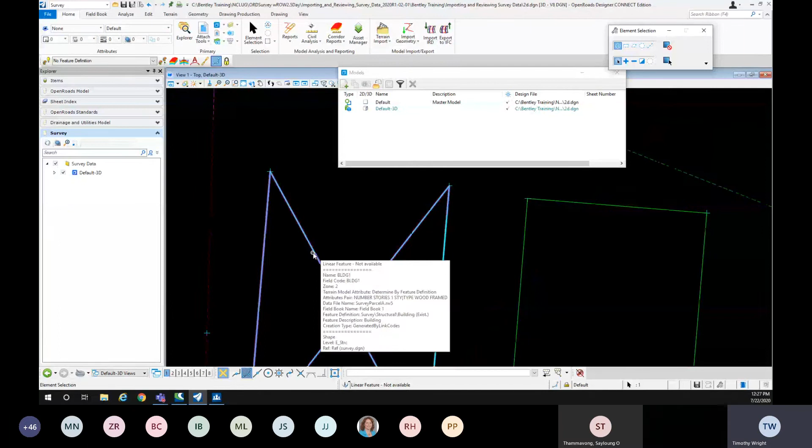So if I select that - see, I don't have the handles there, but this is actually where those elements reside. So it gets really confusing. Right, so don't do that. Don't process survey data in a 2D file.

Yeah, the survey, I guess, has just got me stumped with just all 3D, while in the OpenRoads modeling, we've got 2D, 3D in the background running. I guess the big question is how do we reference 2D information in the 3D model, in a 3D survey file, and display them differently?

Yeah, what are you going to be doing with that 2D data though in your 3D file? Well, we referenced it, we've got to show the plan sheets. We've got to show like existing right of way, linear features. We've got to show wood lines. We've got to show, you know.

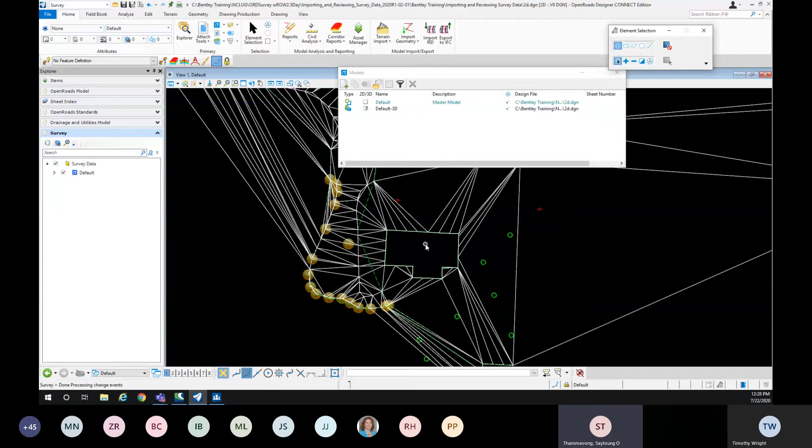Okay, these things, and those aren't - oh, they come in from planimetrics, you were saying, right? Yeah, they could come from planimetric. Or remember, you were showing a survey pipe that was in there.

Can you set, when you bring that in as a feature code in the 3D view, set up as a model pipe, I guess existing pipe, and then when I reference it in 2D plan, it shows as a dash line, like our regular symbology? How does that work? I guess how would you bring in that existing pipe?

You had annotated earlier, it was just a line, but when you bring it in, I guess from your field book into a 3D model file, can you show that as a model 3D pipe, existing pipe? You mean to actually have it modeled in 3D? Yeah, yeah.

You could do something - well, I don't know if you could do that in 3D though. That's a good question. We do have, under the survey settings here, we do have element attributes. So we do have - oh, we're not in a survey file. See, this is where being in a 2D file is kind of wonky, because we really don't have survey settings here. It's just crazy.

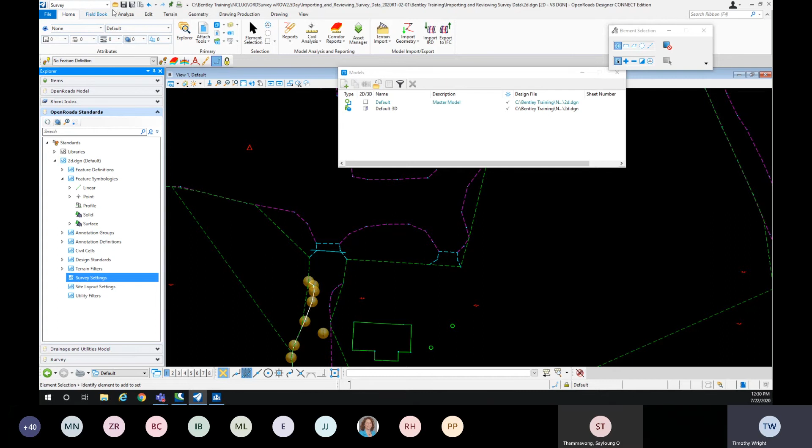All right, so let me go back to a decent one here. Which one did I do? I did demo here.

All right, so we're back down in the 3D world. So help me out—remember you were talking about the culvert, if you wanted to show it as a 3D cell? You can do that with these standards here. There is a mechanism that we have.

So out in the field, the guys could... where is that? I think it's under general. Yeah, attribute overrides. Okay, so I was working with the Los Angeles Sanitary District, and they shoot a tree, right?

And they want the drip line, so basically where the canopy is. And that might be like, I don't know, 80-inch or 280-inch or something like that. But they wanted a cell that would actually size to that.

So I know this works in 2D, I know it works with like a point cell. I'm not 100% sure if it would work for a linear cell in 3D. I'm not sure you could map your pipe automatically from survey, but this is the way I would first attempt it—the attribute override here.

So what you can do then is say, I'm going to create a new one here. The point feature—you can pick which point feature it is, or whether it's a linear feature, and does it end with or contain this name or this feature code?

And then you basically say, I'm going to take the attribute value, use it as an override, and I'm going to override it by the scale vertically or horizontally, or scale both, or change the element template. That's the one I think might do it for you right there. Oh, nice. Yeah, okay, yep.

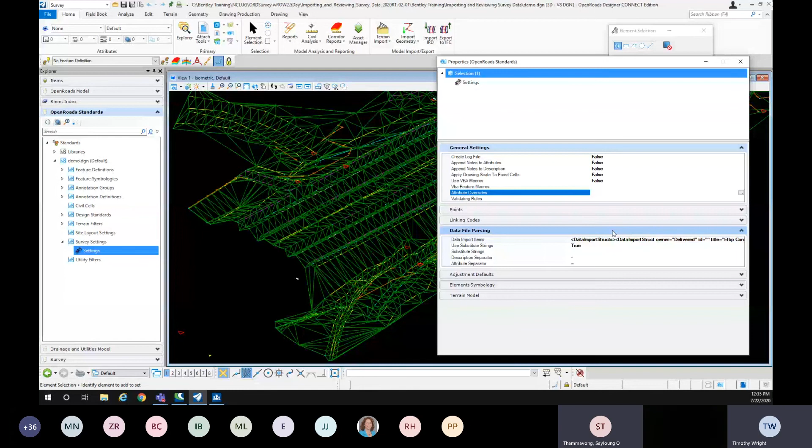Yeah, there's a couple ways you could tackle it. I would get with the crews and talk things out. I'd have to try this attribute override - I know it scales in the plan, but I don't know if it would work on a 3D line style. There are ways around that though, right? You don't necessarily have to scale it. You could pick every feature type - if that attribute value is 30-inch, then use this 30-inch line style, 3D line style, to update it.

Yeah, we kind of do that with the proposed guardrail. We show it one way in plan view, and then the 3D model is actually the guardrail model - that's another custom 3D line style. Guardrail, right of way, those kind of things - you just want them to look different in different views. So those are both good examples of that.

Good, yep, we'll definitely look into that. Yeah.

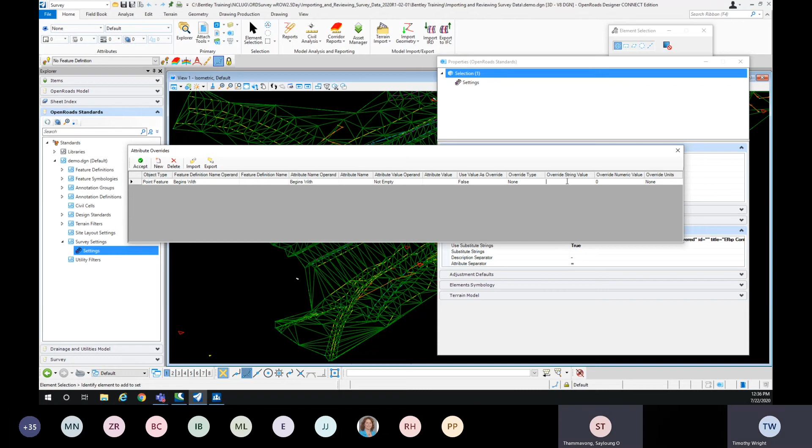Good question, I like questions that make me think - not always, but that was a good one. So like I said, a couple of different ways you could tackle that. I'd have to play around with a couple of scenarios to see what might actually be the best workflow. Okay, good questions though - any others? Do we still have anybody left? I heard quite a bit of pinging while we were doing that.

I have another question, just okay - you don't really have to show me. My question is just, when you showed us how to modify data, can you add a point in there? I know you dropped it, but can you easily add a point if you had to add or connect two lines or something like that?

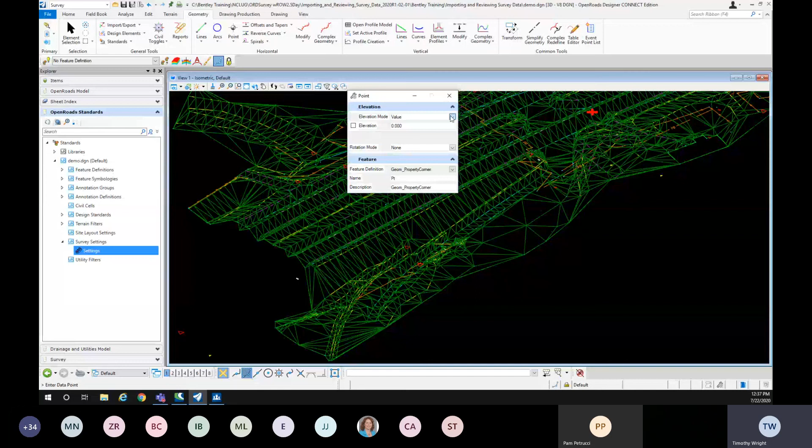Absolutely, yeah. So you can come in here - let me see, where is that. It's under geometry, you can make a point. This is kind of cool, right? So you've got an elevation mode, so you can actually take it from the terrain model, just put your point right on the terrain model, or you can key in a hard fixed value, or you can pick it from a plan element, or you can say none - and it just doesn't give it an elevation.

Rotation - but then you just pick your feature here, whatever feature, and you'd throw some points out there. There's my right-of-way point. So yeah, it's pretty easy to go ahead and just throw that out there. So now I just come out and pick - there it goes. Takes a second for it to figure out where that's at. So there's a couple of right-of-way points right out. Okay.

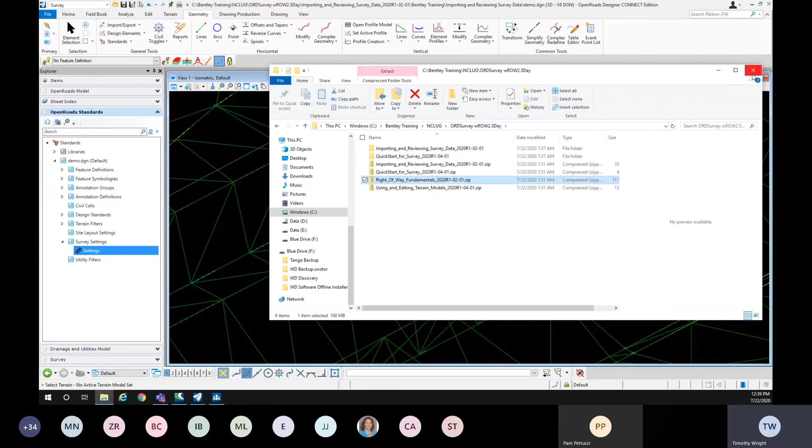Any other question? And this is something too - if you're not familiar with Civil AccuDraw, I definitely think you should take some time learning it. There's a class called, what is it - something right of way. Sometimes I suggest classes even if you don't ever do right of way - where is it, right of way fundamentals. This is a really good course because it talks about several different options, if you're doing any kind of right-of-way or linear geometry, plans and plats, things of that nature.

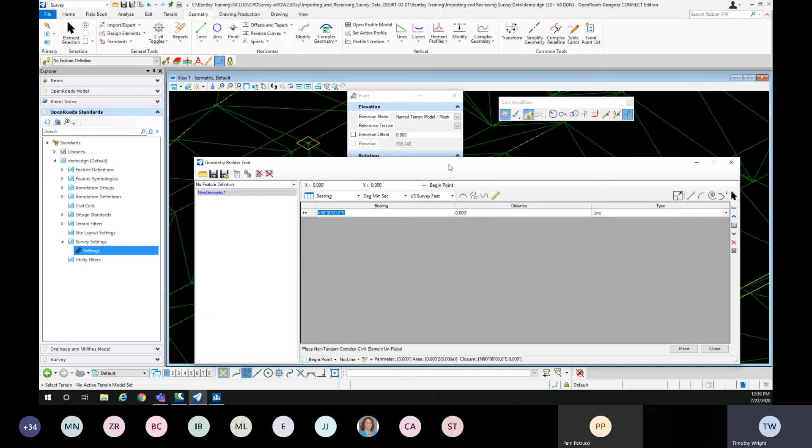Because under the geometry tools here, we have the geometry builder. So if you don't like to build things graphically, you can come out here and create an element just by entering bearings and distances. So you can throw those elements out there, and then at the end graphically throw it down, and it has all those rules in place. So that's another really good class to go through. I don't know why I didn't save that - so that was fundamentals, right-of-way fundamentals, I think. Definitely another good course to take a look at.

Okay, did that answer your point question though? Yes, thanks. Sure, sure, any others? No one's brave enough, huh? All right.